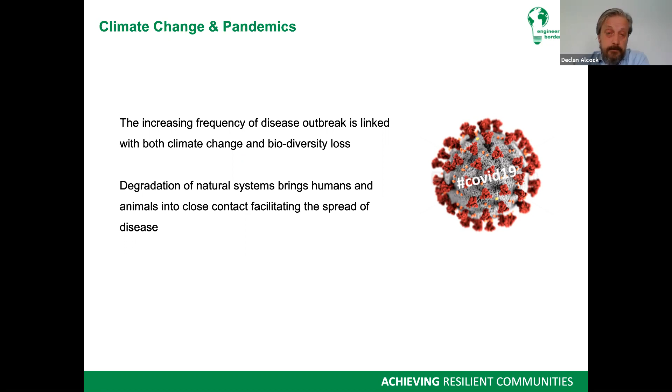While it's understandable with all the challenges, people want to go back to normal social interaction, in a bigger picture we know that the frequency of disease and the risk of pandemic is linked to climate change and biodiversity loss. The degradation of natural systems brings human and animals into closer contact, increasing the risk further. So the summary of today really is, do we want to go back to normal? Or should we build on the gains we've had over the last while and move forward and try to build a more resilient future?

The big issue in Europe, we're talking about resilience in this webinar series, and it is a huge issue in Europe in terms of energy security. We import about 53% of our fuel, and a lot of it is fossil fuel. To build resilience and energy security there are really two options: one is transition away from that to renewable energy, and the other is to reduce the energy demand to begin with. Realistically, we have to do both.

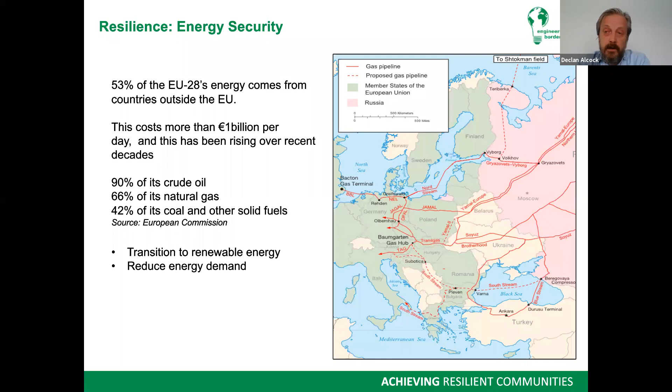An indicator of progress with the transition to renewable energy - these figures are a few years old - 19.5% of energy for heating and cooling in the EU was from renewable sources in 2017. In Ireland, pretty feeble, 6.9%. So that hasn't been going very well, or definitely not quickly enough.

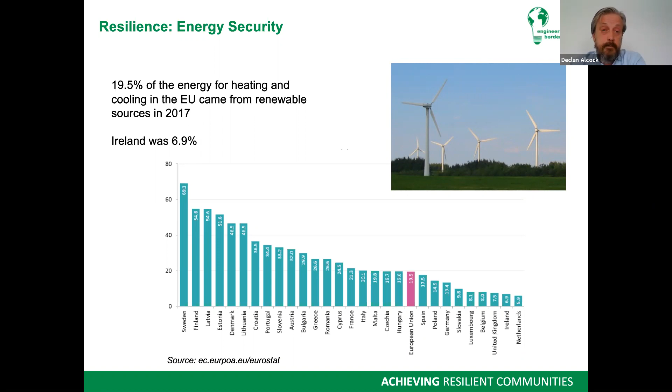To reduce demand, the big win here is the building sector. It's the most significant energy sector in the EU. Well-known figures there: 40% of energy consumption comes from the building sector, and it's been recognized at COP21 a few years ago that it's the most economically beneficial path to reducing global emissions, with numerous economic, social, and environmental benefits.

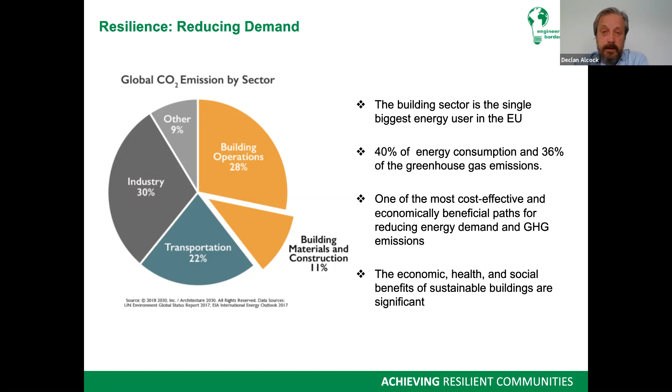A lot of people, when they think about energy usage or CO2 emissions, think about the level of insulation in their house, what their utility bills are like, or maybe solar panels on the roof. The picture on the left there is global CO2 emissions by sector. We can see that while operational is certainly a factor, embodied carbon is often an overlooked element of it.

If we look at this building life cycle, operational is actually small. It starts off with extraction of materials, goes to manufacturing of products, eventually gets to the construction site. You have plant equipment, people traveling to and from site. Then the building is in operation, so you have use, repair, maintenance, replacement. Eventually it gets demolished and disposed of in landfill or recycled. So that's a very linear process.

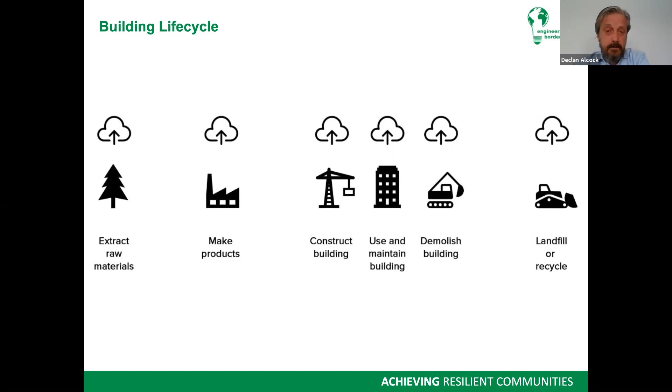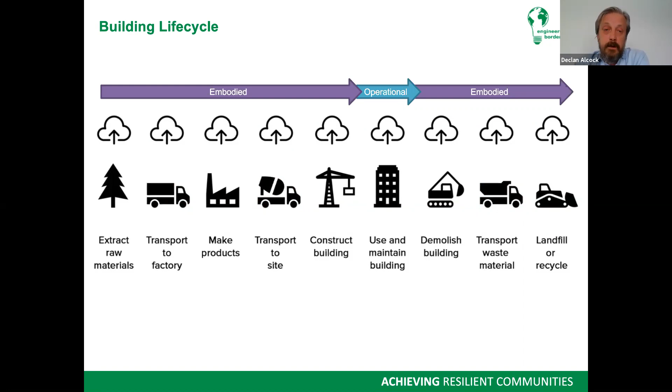All along the way there, you also have transport - you have to transport raw materials to the manufacturing plant, transport them to the site, transport them to recycling or disposal. So if we look at it that way, operational is a very small element of it. Embodied carbon, which is sometimes overlooked, is actually quite significant.

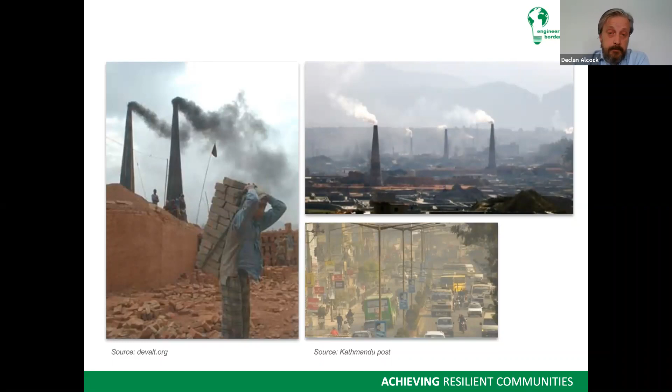Going back to Kathmandu for a second, the air quality issues there, you can see a lot of it has got to do with two factors: transport, but also manufacture of materials. These are really inefficient coal-fired brick kilns used to manufacture bricks because of the expansion of the city. It's a very stark indication of the impact of manufacturing in the building sector on air quality.

We spoke briefly about SDG 11, and while a lot of people think about it in terms of housing, there are a lot of other elements underpinning it: transport, air quality, green public spaces, and climate change. These are all elements where green building can assist.

For those of you who aren't aware, there are lots of different terms - green building, passive building, sustainable building - they all pretty much mean the same thing. This is the World Green Building Council definition of green building: during the design, construction and operation, it reduces or eliminates negative impacts and can create positive impacts on both the climate and natural environment.

How it does it: efficient use of energy, water and resources, use of renewable energy, reduction of pollution and waste, enabling of reuse and recycle. As I said, it's typically a linear process - it really needs to go circular, starting and ending with reuse and recycle. Good indoor environments, use of materials that are ethical, sustainable and non-toxic. And a design that enables adaptation to the changing environment, particularly now with climate change and a warming environment - that's very important.

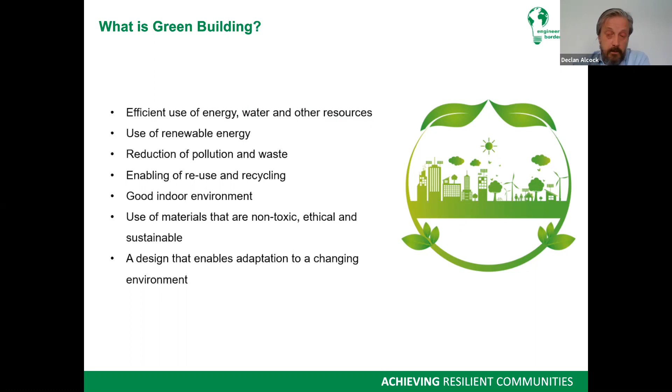To summarize it, it's really about people and planet. Green building thinks of both of them in design, construction and operation.

A lot of the principles behind sustainable design or green building are not new - we've been dealing with them for centuries. In different parts of the world, under different climate conditions, different types of buildings developed, mostly by trial and error. It was about using the materials that were locally available, to use the beneficial aspects of climate and mitigate against the worst extremes, whether hot or cold. The same thing happened in Ireland and all over the world under different climate conditions.

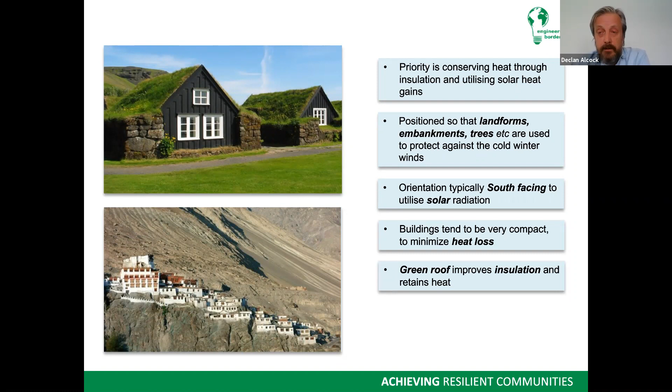Green roofs, a lot of times can be sort of turf roofs to help with insulation as well, to retain heat. And local materials - for example, if you look in Scandinavia, it's timber. Pretty common material there, it's good for insulation, it's low thermal, or high thermal resistance.

In the mountains, you're above the tree line, so obviously timber isn't as useful as a building material, so they might use rammed earth. That can also soak up heat during the day, providing a buffer against the cold night air.

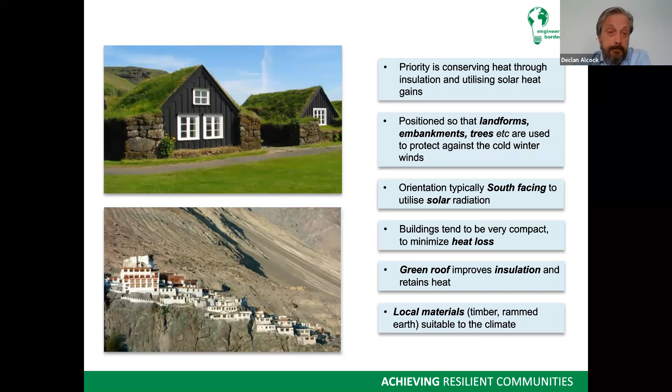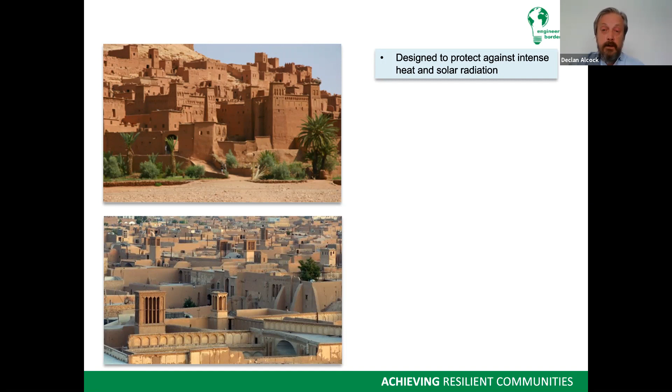If we look at hot climates, similar thing, use of local materials. Obviously the main feature of design here is protecting against intense heat and solar radiation. Because there's a very large swing in temperature - very hot during the day, cold at night, typically in a desert climate - they use thermal mass that absorbs the heat during the day, keeps the internal areas a little bit more comfortable, and then when it is cold at night, it releases the heat.

A lot of shading. Buildings are constructed close together so they overshade each other. And then social spaces like streets are accessible to people because they're in the shade during the day.

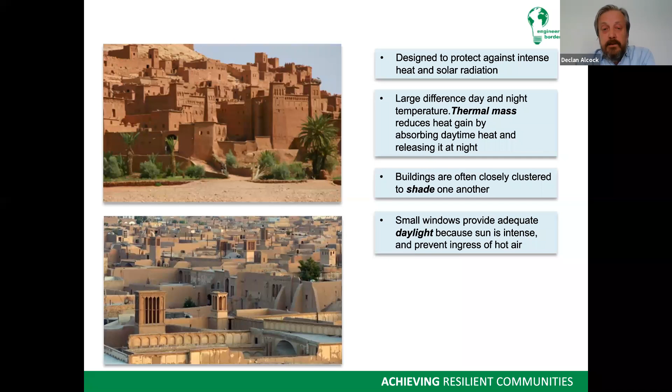Small windows - because the sun is so intense, it's going to provide adequate daylight as well, and it's trying to limit hot air getting into the buildings. And the use of separate ventilation openings and stacked ventilation.

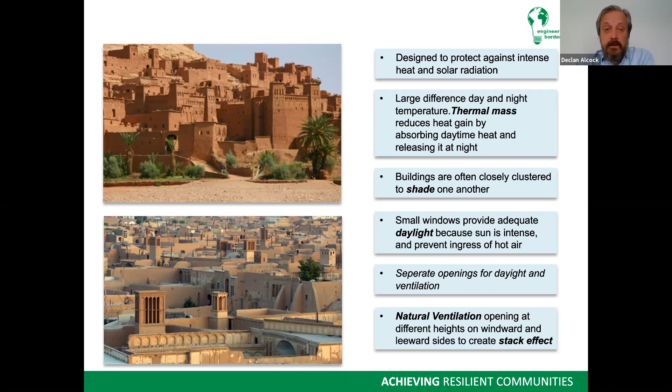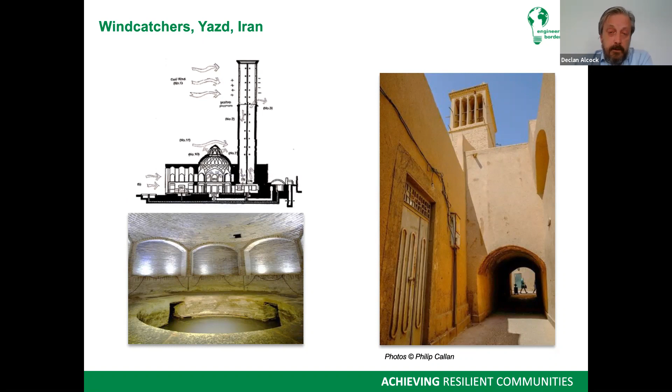But these are all items that are common in building design today. One really interesting one, and it'd be called innovative today, is in Iran, the use of wind towers, wind catchers. This was centuries before - it was like the 1700s, older ones have been found from the 1600s. Centuries before people used advanced simulation modeling like we have now, and it's a really impressive way of getting around in a desert climate using natural ventilation.

So I mentioned a few common things here, and people designing buildings today would use the same principles: using local materials, or at least materials appropriate to the climate, optimizing orientation, solar radiation, shading, using daylight, natural ventilation, insulation. So it's all about energy use and building for the location rather than a generic type of building.

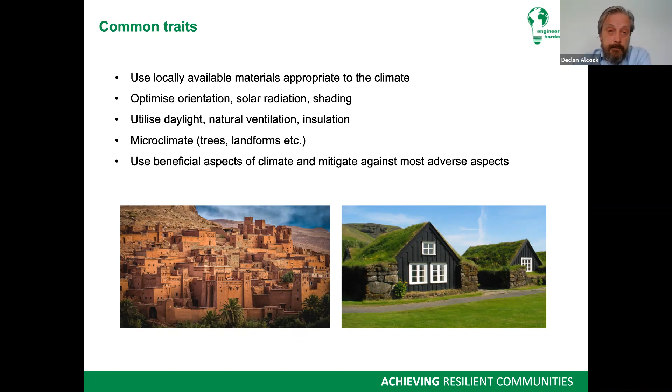And we seem to have somewhere along the line transitioned to this: no matter what climate you go to, whether it's hot, cold, humid, you'll find concrete buildings with lots of air conditioning. They're just built highly serviced to deal with the climate.

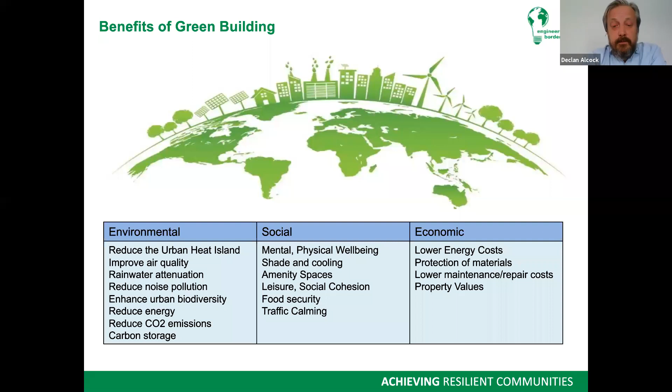So maybe we need to simplify building design and get back to first principles. In terms of green building, there are a huge amount of benefits for them. We're not going to go through all of them, very limited on time today, but we'll show some examples.

For example, the urban heat island effect. Because of the amount of concrete, asphalt, etc. used in cities, and it absorbs solar radiation, it can actually cause a 4-degree temperature difference between a city and surrounding countryside. And this is going to become more of an issue as the climate warms.

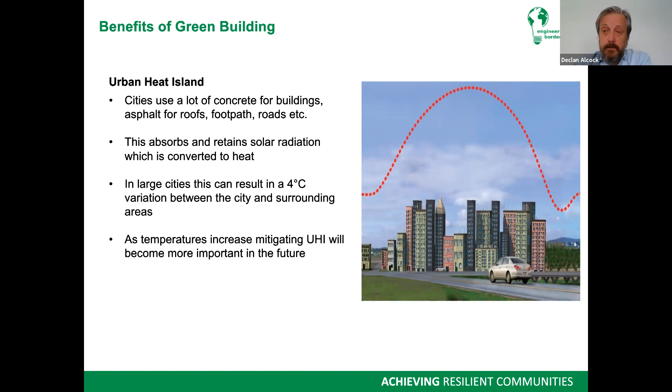Everyone is probably most familiar with green roofs. A big issue in the EU, and probably worldwide, is the fact 75% of our existing buildings are inefficient. So it can provide a certain amount of insulation, which is useful for reducing air conditioning or cooling requirement in the summer, and also heating requirement in the winter. It can humidify the surrounding air, provide a little bit cooler environment, and also a certain amount of reflectance of solar gains.

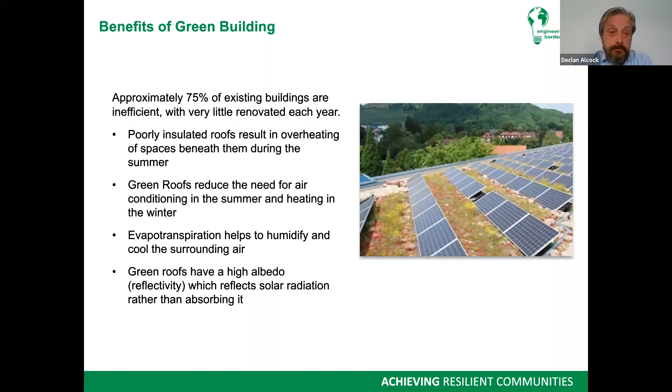Living walls aren't so popular in Ireland at the moment, but they're used quite a bit around the world. They've been used for reducing traffic noise, for example. There's not a lot of research into it, but one paper I read said it reduced noise by about 15 decibels, or about half the amount that double glazing would reduce it by.

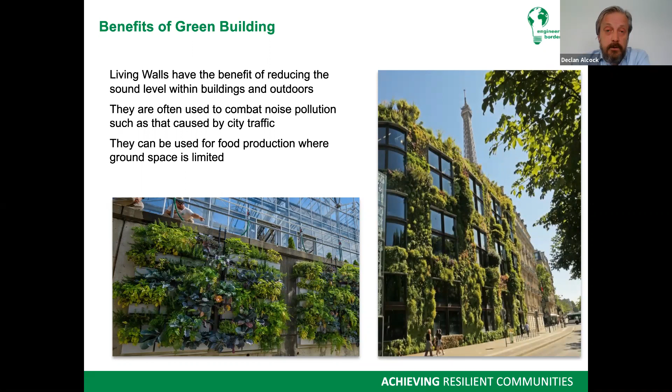It could also be used for food production. For example, if ground space is limited, there's a lot of surface area there to work with. This is probably the best example of it, and probably the most photographed building in the world at the moment, really a flagship green building project. This is Bosco Verticale in Milan.

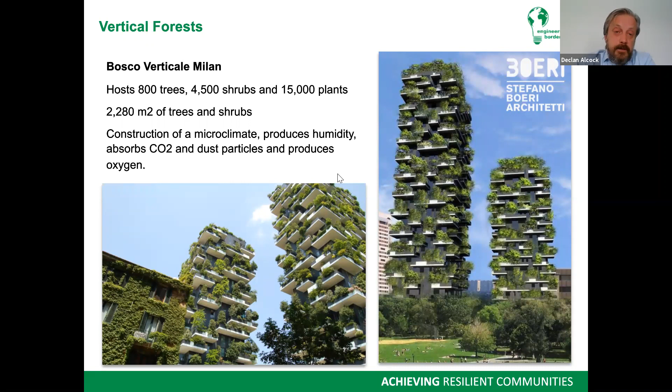Two residential towers, 800 trees, 4,500 shrubs, and 15,000 plants over the surface area, on the balconies and so on. This exhibits a lot of the benefits we were talking about. All this greenery absorbs pollution from traffic and from the city. It also produces oxygen and improves air quality. Because it provides shading, it keeps the building cooler in summer, so there's less requirement for cooling, and it provides a buffer against cold air in winter, so less heating energy. It provides a whole urban ecosystem for wildlife and birds, and also reduces the heat island effect.

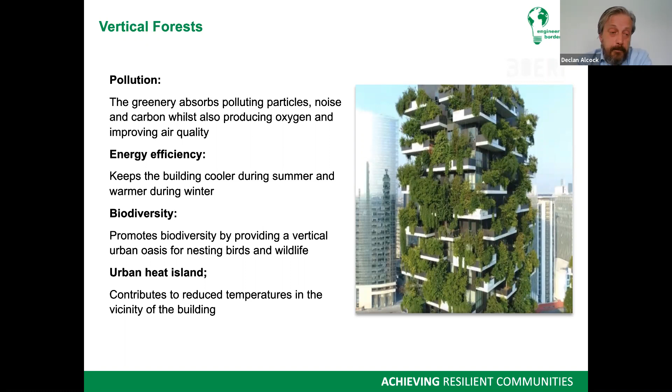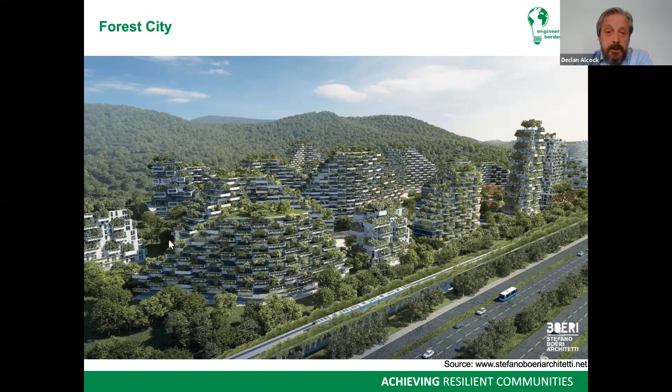An issue that's been recognized with this building, a real challenge, is the amount of concrete required, which has high embodied carbon. In the previous example, they did try to optimize and reduce it, by reducing the weight of the planters on the balconies, using specialized soils in the planters to cut down on the requirement for concrete. They also used heat pump technology to reduce energy, and solar pumped groundwater for irrigation rather than potable water.

But I think the next big movement is going to be to get away from, or at least reduce, that impact. The cement industry has some companies, one Irish company in particular, at the forefront of reducing the environmental impact of cement.

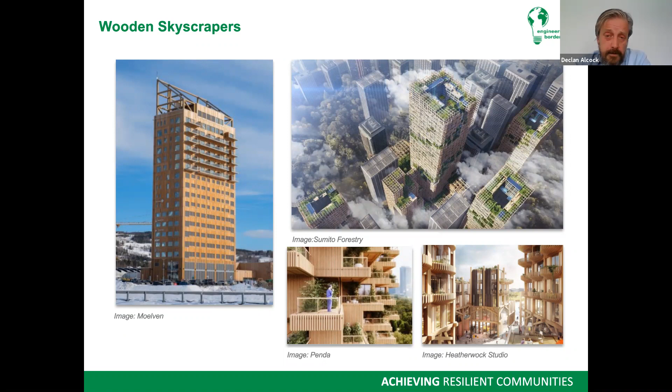This is a new movement in green building design. The tallest timber building in the world is in Norway at the moment, 18 stories. These are master plans and concepts for buildings in Tokyo, Canada, and London. So that's going to be another big movement in green building, to tackle embodied carbon.

So that was the outside of the building. If we move inside now, we've all obviously been spending a lot of time indoors recently, more than normal. But pre-COVID, people would typically spend about 90% of their time in a building, whether mostly at home, at work, at college, or wherever. Temperature, lighting and air quality have a big impact on health and well-being.

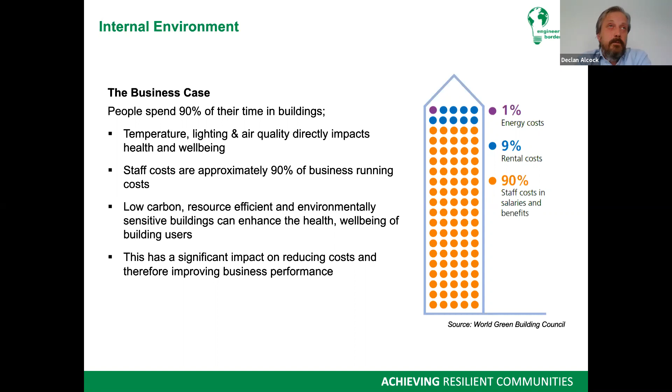You can see on the right, this is from the World Green Building Council. In terms of business and the business case for green building, energy is only about 1% of costs. The potential saving on 90% of a business's costs has got to do with people. So if you can improve the health and well-being of your staff, they're more productive, happier, more content with their job, and it can have a huge impact.

And it's based around biophilic design. There are three aspects of it. I suppose the main point is you're bringing that experience of nature indoors rather than relegating it to parks and the outdoors. Even if people want to relax, they'll generally go for a walk in the park or go to a hillside — it's that natural human connection with nature. Given the time, we won't go deeply into this, but there's the direct experiences like light, air, water, plants, and indirect experiences, like even natural materials.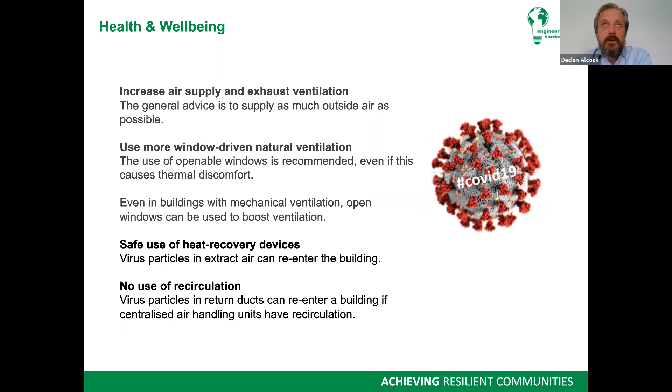And there's been recent guidance to do with COVID and the potential for transmission through ventilation systems, so there are now recommendations to increase the amount of natural ventilation in workspaces.

In schools, a very important learning environment for kids, it's a very formative part of their lives. Research has shown improvements in good, well-daylit spaces with good air quality, and even for people who have a view.

It could also potentially, and this is important in COVID as well because of the proximity of people in classrooms, reduce allergies, asthma, and transmission of other respiratory diseases. Given COVID and the focus on healthcare these days, going back as far as the 1800s, it was recognised that healing gardens and green spaces had a beneficial effect on patients.

In terms of the EU, we spend a ridiculous amount of money on healthcare. So if people can recover quicker and spend less time in hospitals, that reduces pressure on public health systems and has a financial effect too. The same goes for staff and visitors, obviously a very pressurized environment. This is a wonderful example of a hospital in Singapore. If you can reduce those pressures or give some release from it for staff, it's obviously beneficial, and for visitors too, as visiting a hospital is a worrying time for people. So anything that can make people feel calmer and more relaxed helps.

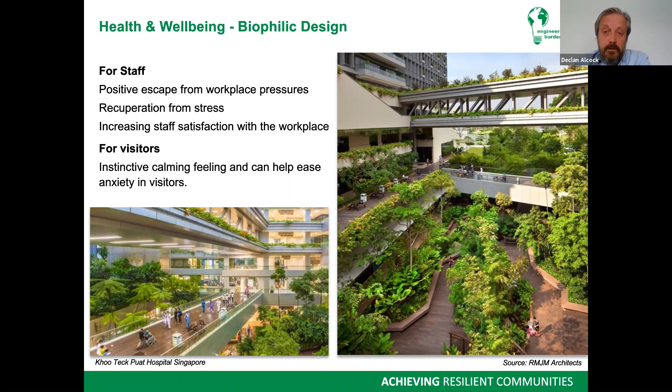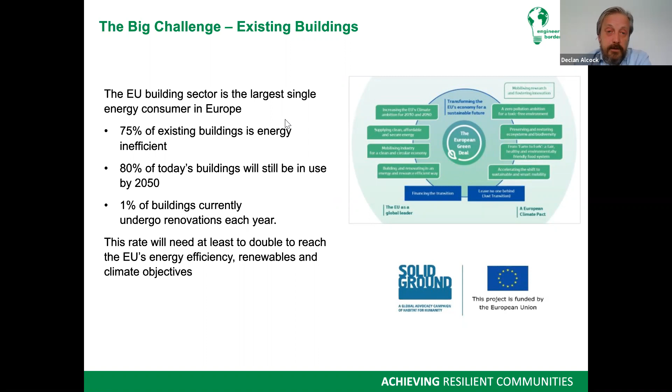The final slide on this part is the big challenge. We don't have time to go into this today, it would be a separate webinar, but the European Green Deal has recognised that there needs to be a renovation wave around Europe. It's one thing designing new efficient buildings, but 75% of existing buildings are very inefficient, and 80% of those will still be in use in 2050. That's a huge amount of energy usage, embodied energy as well. There's a very limited amount of renovation happening at the moment, something like 1% of buildings a year. So that's the next wave, a story for another day, but it's going to be a huge challenge.

So if I was to leave you with three takeaways from today: one is keep it in the ground. In my opinion, there's no valid argument for using fossil fuels in buildings anymore.

I mentioned SDG 11 and its impact on other SDGs, so I'll try to illustrate that here. We need to transition to renewable energy and do it a lot more quickly than we're doing it. We also need to transition to a zero carbon built environment. That's also been slow, there's been nearly zero movement, just incremental steps. It needs to happen a lot quicker, and it has an impact on society, industry, economic growth, the green economy - it affects several areas of society. So that needs to happen a lot quicker.

And the final one is we have to remember that buildings are for people, not robots. As in the example of the two offices, the days of sectioned off little workspaces are long gone, I think. We need to make buildings more amenable to people for their well-being and satisfaction.

This is from my son, Arthur, who's going to be two next month. A few weeks ago he was playing, and this was his attempt at building a house. It really struck me - no preconceived notions about houses or how they should be built. So I asked him why he put the trees on the roof, and he said it was for the bumblebees. If this is obvious to a less than two-year-old, I don't think there's any excuse for the rest of us who are apparently professionals.

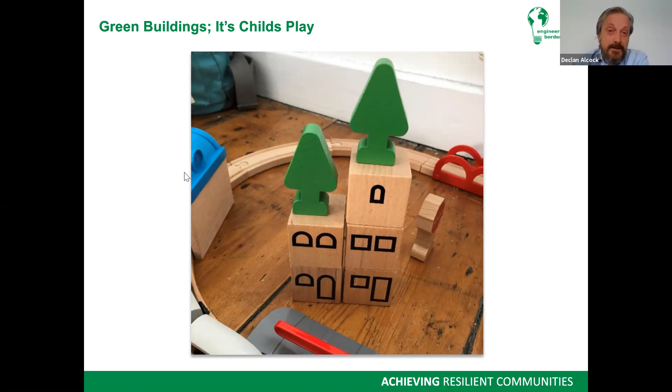I'm just going to play one last video here for you, we'll finish up with this. It's a project - it's okay looking at slides, but this is an example of how we're trying to increase resilience in a community, with two partners, Habitat for Humanity and Zambia Ireland. It's a project they're doing in Zambia that we're very proud to be involved with, and it'll illustrate things a little better than slides. It's only a few minutes long. If you have any questions, we'll take them directly after this.

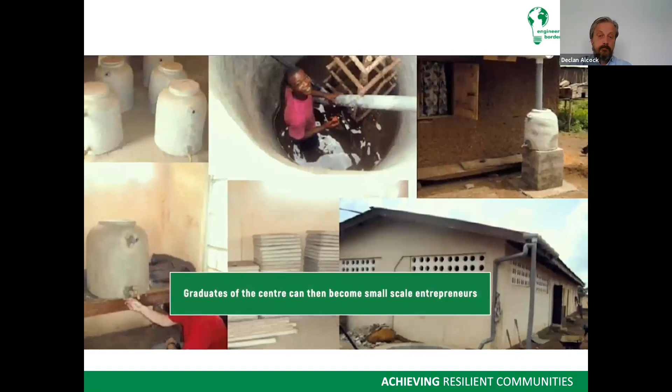Okay, so that's the end of the video. Does anyone have any questions?